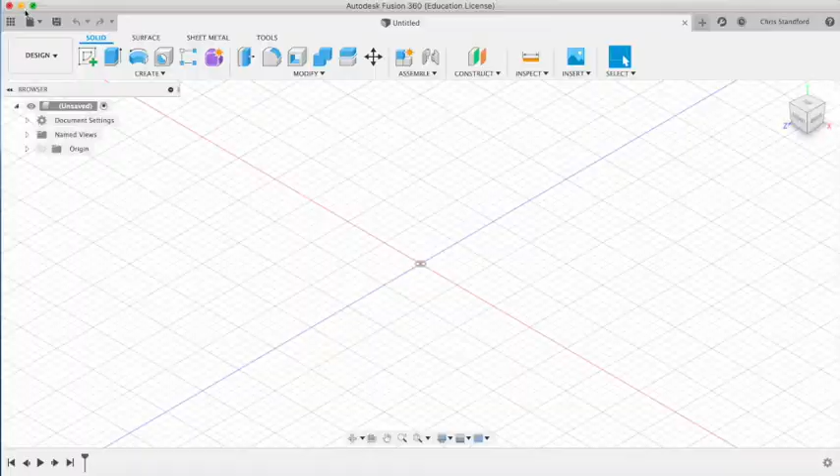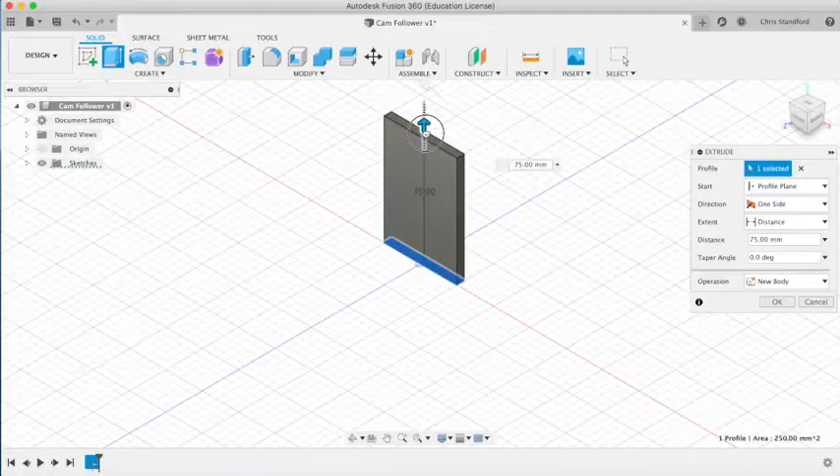So we're going to start by saving our new file. I'll call it cam follower. Then we're going to create a sketch on the bottom plane so we can extrude that out. We're going to go 50 by 5 millimeters and then extrude that up. Let's go for 75.

And then on that face I'm going to create a 15mm lip along the top and extrude that out by 10 millimeters. So this is just something to mount our cam and our follower on.

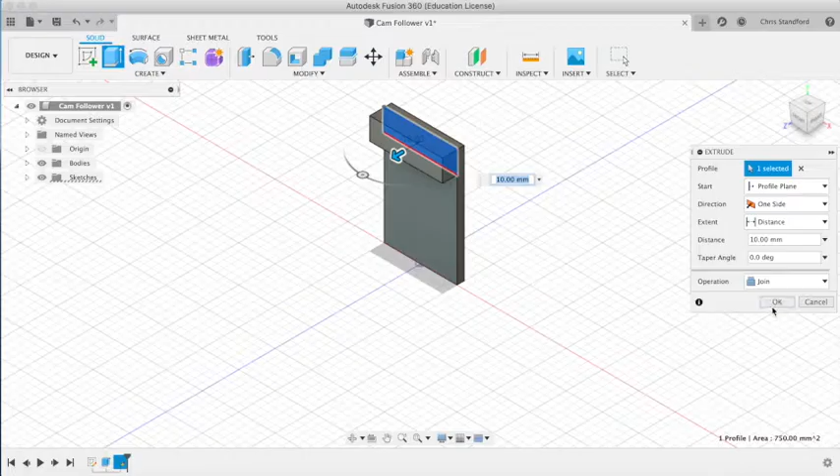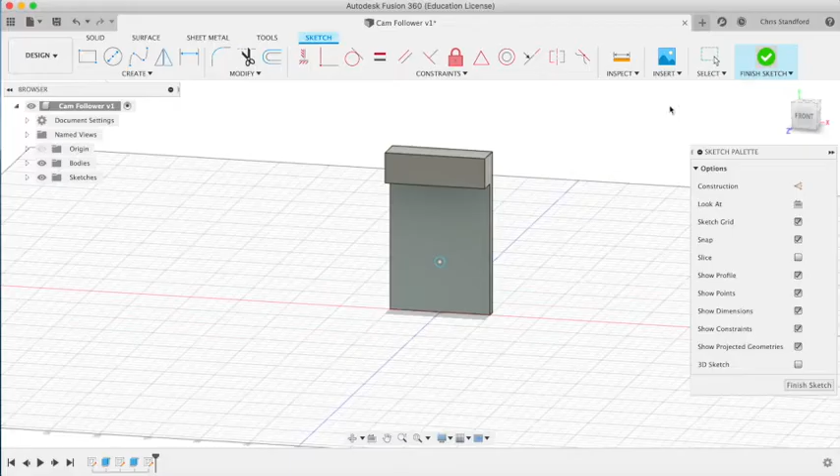Now we need a spindle for our cam to revolve around. So we're going to create another sketch and create a 5mm diameter circle and then extrude that out by 5 millimeters as well. And then we have our frame in which to mount our cam and our follower on.

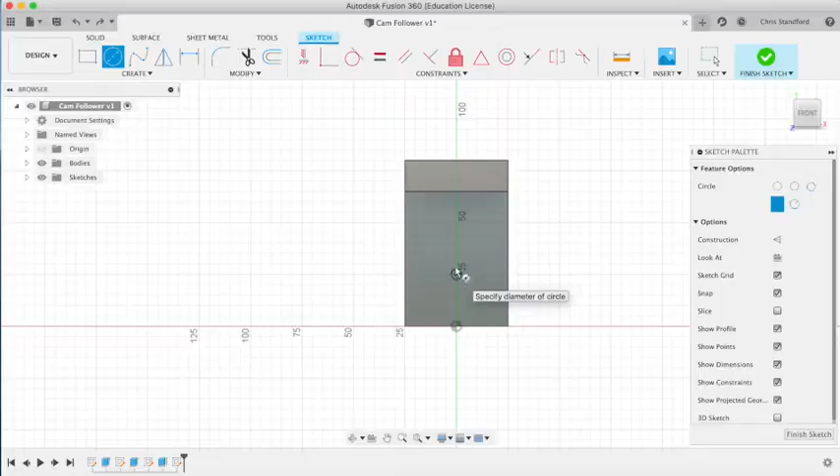So if we want to create our cam, we're going to draw a sketch on the surface of that frame. And I'm going to use two circles, a 20mm circle and a 10mm circle to create the shape of my cam. And then I'm going to use the line tool to join those two circles up.

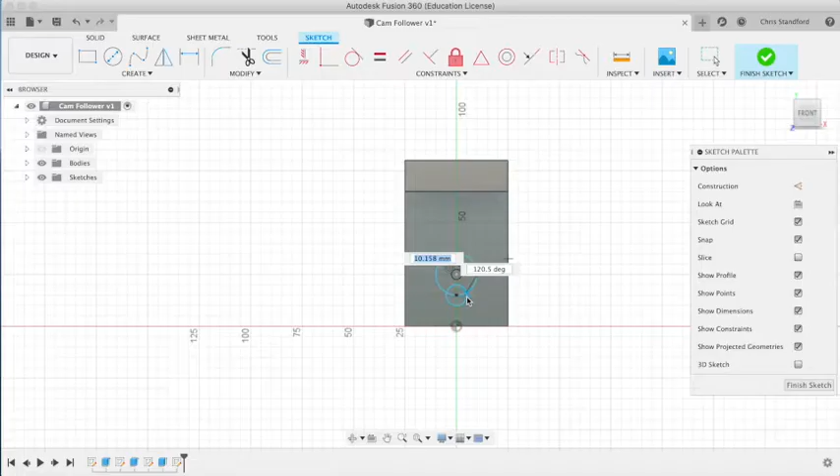So if we go to create, then it's a line, or we can just press L, we'll do the same, and we can draw a line from the large circle to the smaller circle. If they don't quite line up now, don't worry, because we can just go to the tangent button there, click on the line, click on the circle, and it'll then line those two items up.

Once we're happy it lines up, we can trim off the extra bits using the trim tool and then finish our sketch.

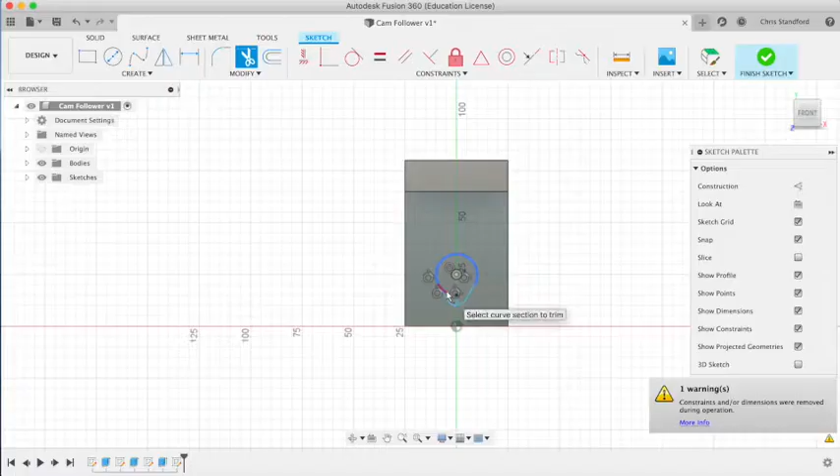We can then extrude our cam shape. It's important when we extrude that we need to change the operation to new components, so it is a separate entity to the frame, and then we can extrude that by 5 millimeters.

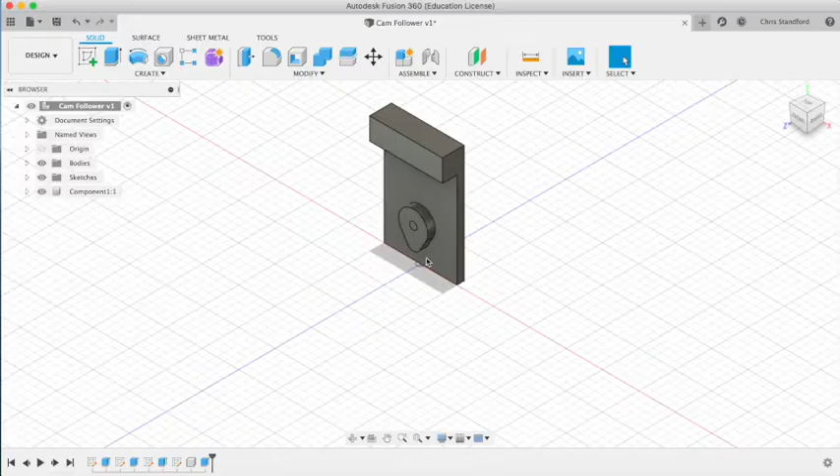Just to help me distinguish the different components on the screen, I'm going to then attach different material appearances to my elements. This just makes the different components clear to me on screen.

So if I grab my cam and move it to one side using the mouse, you'll see at the moment it isn't attached to the frame. So we're going to assemble that.

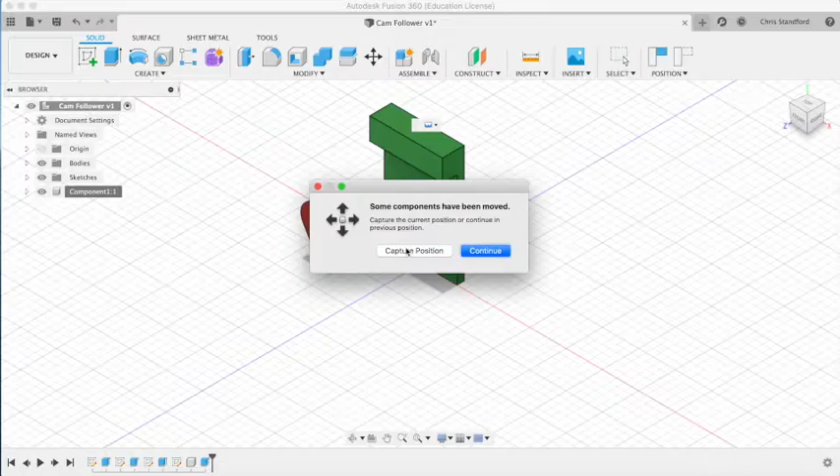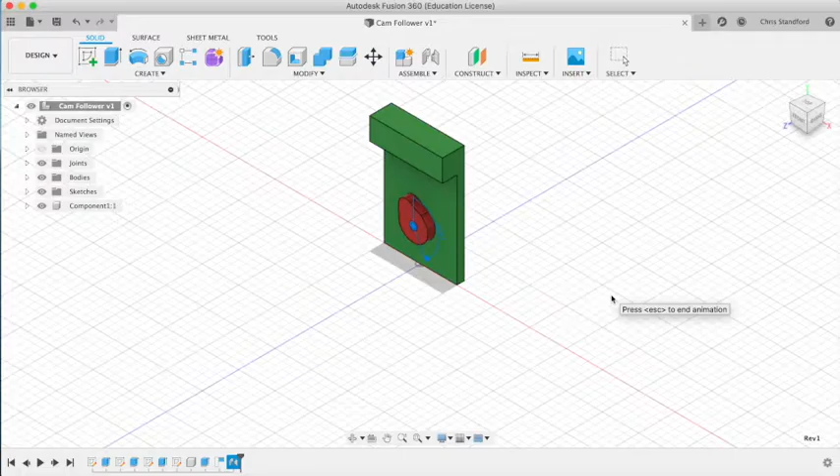I'm going to click the center of that circle and the center of that spindle. And then we're going to change the motion to a revolute, which means you can see it spinning there on the animation. OK, so if I right click on my joint icon and click on animate model, you can see it spins there as I'd like it to. Press escape to stop the animation.

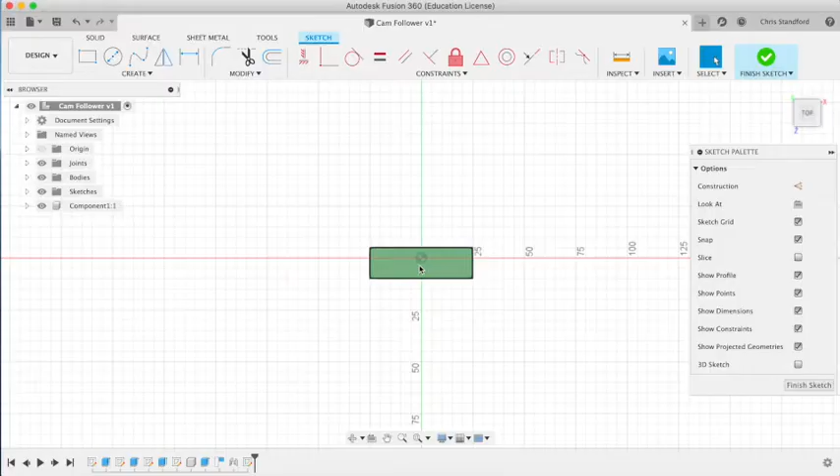Next job, we're going to create a hole for our follower. So sketching on the top surface, we are going to create a 5mm diameter hole. We can't use the grid to center this time because the grid lines are in millimeters and we want it to be 7.5 millimeters, which is half of the 15.

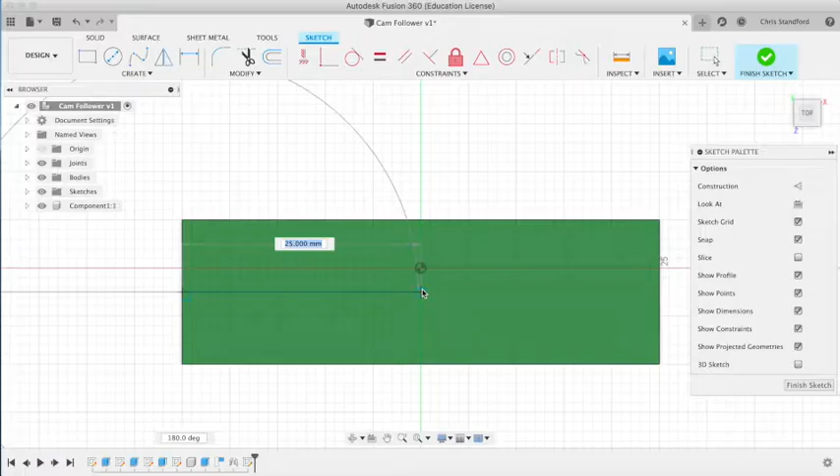So we're going to start by drawing a guideline from the center point of there out to the middle, and we can use that then to center our circle. So we've got a 5mm circle, click on finish sketch, and we can then extrude that.

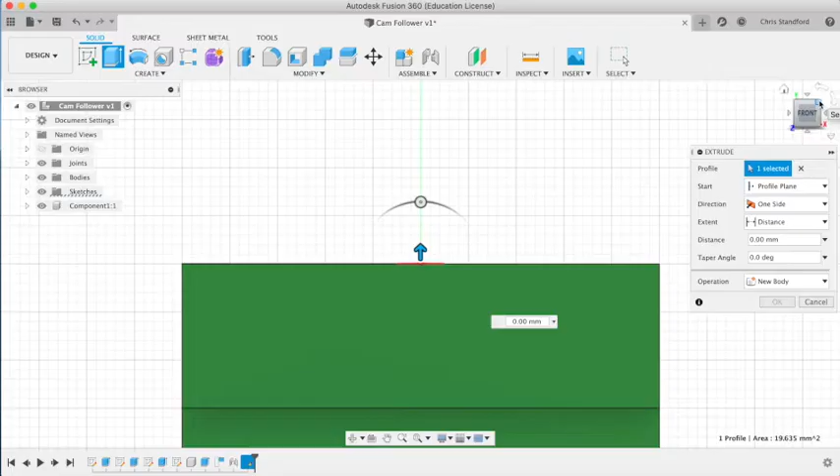Let's just see it from a different angle. Oops, let's try it again. We can now extrude that down, so -15, so it cuts away through that frame. Make sure it's gone all the way through. Operation cut, OK.

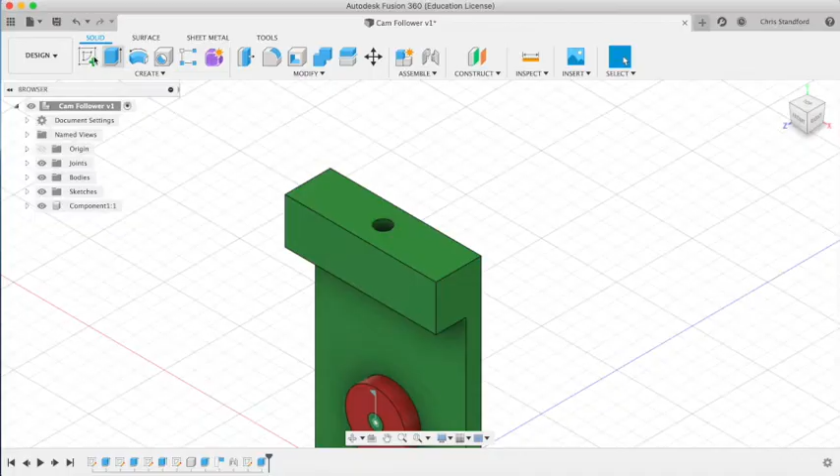Next we're going to create our follower. So again, sketching on the top surface, we can create a 5mm circle in the same place as the hole, and then we can extrude that down to meet the cam.

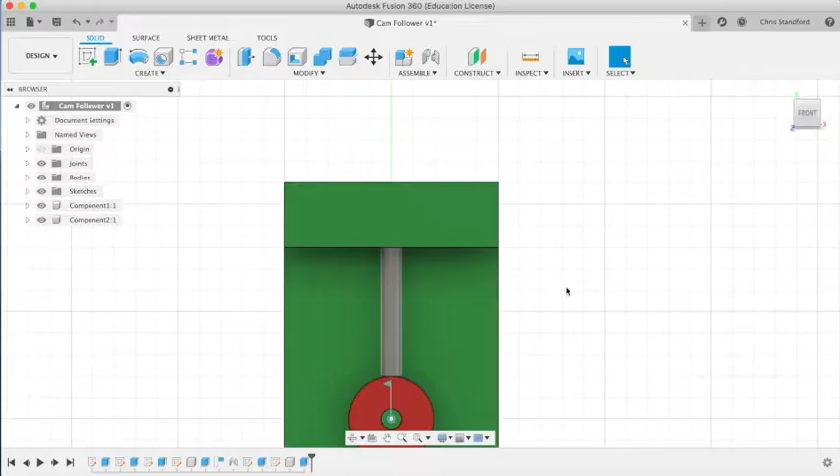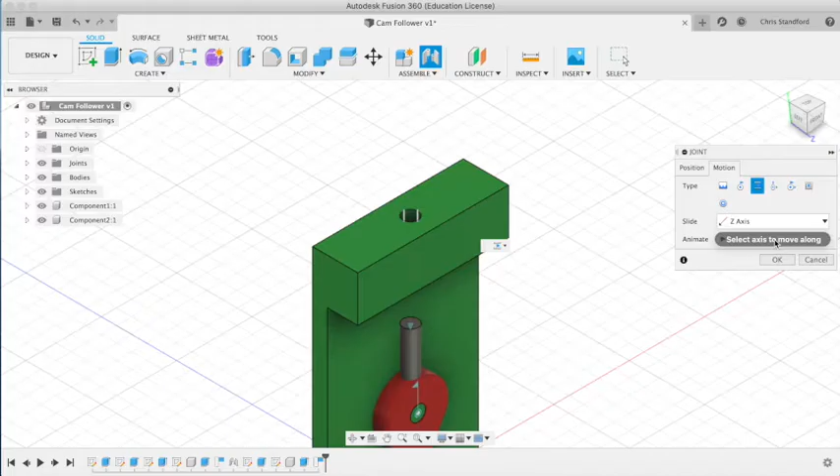Just like the cam, if we try and move that follower, you can see it's not attached. So we're going to assemble those two components as well. We go to assemble joint, and this time, rather than it being a revolute motion, you can see it spinning there on the axis. We're going to go to motion and create a slider joint, which means it's going to slide.

It's going to slide up and down through that hole along the z-axis. Let's just quickly give that a material appearance as well. We'll go for blue.

So our follower now slides up and down along that axis, but it goes through the cam, which we don't want to happen. So we're going to set some limits for our motion.

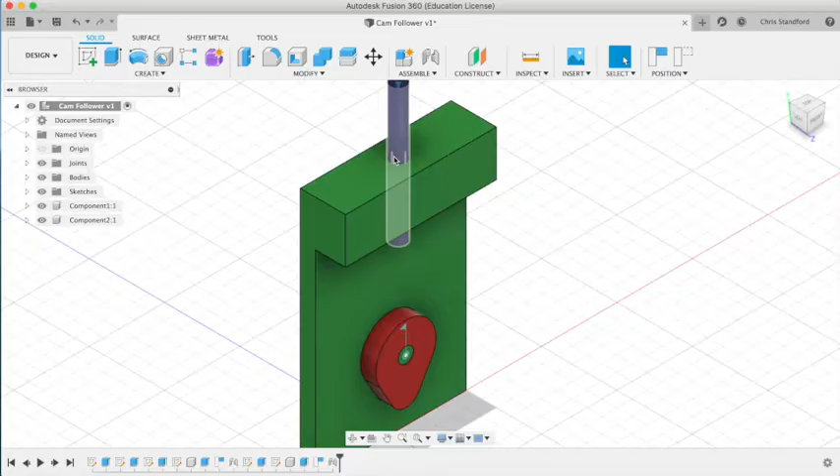If we right click on our little motion symbol, we can click to edit joint limits. We can have a resting point. So now if I click on resting and 0, whenever I move that and let go, it'll automatically go back to that resting point. So I can move it up or down, and it'll automatically spring back to that resting point.

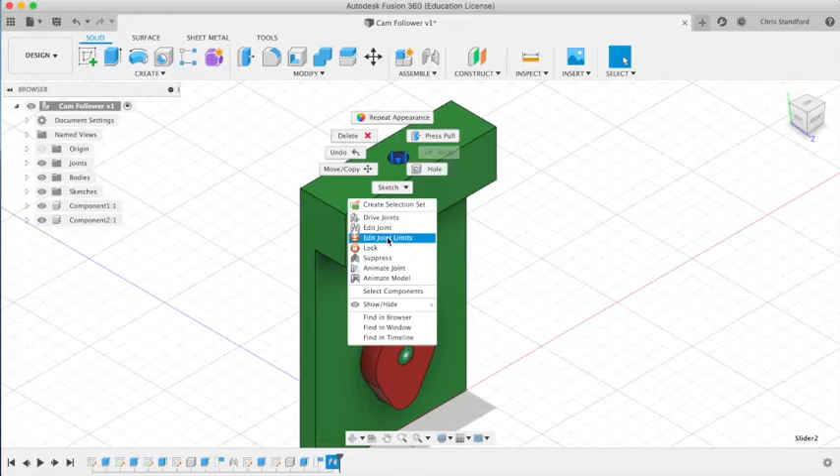But I don't want it to go down, I only want it to go up. So we're going to right click again, edit joint limits, and give it a maximum movement as well, so we'll tick the maximum box. The maximum is going to be 0 as well. If I animate that now without it, you can see it goes up and down. If I click on maximum, now it only goes up and ends at that 0 point.

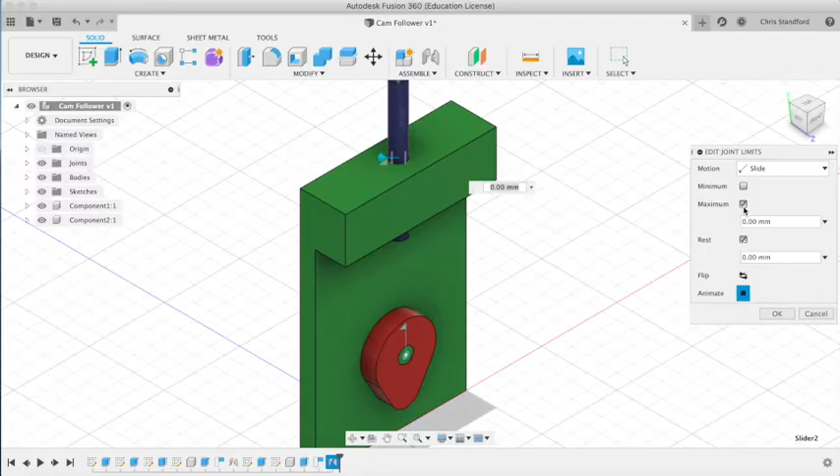So now the follower moves up and down like it should, and the cam rotates like it should. However, when I animate my model, you'll see when the cam rotates, it just goes through the follower as if the two don't exist in the same model.

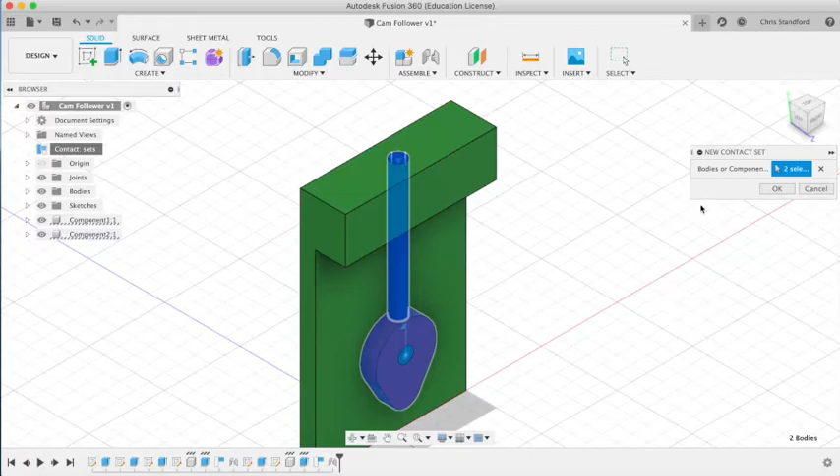So we need to create some contact sets. We're going to click on assemble, then enable contact sets, and this contact sets icon appears. We click on new contact set, and we just want to click on the two components that we want to be able to relate to each other physically. I'll click on OK, and now if I animate that joint, right click, animate model, you'll notice the cam pushes that follower up.

Now, as you can see, it's a little bit sticky the way it moves at the moment, and that simulates what would happen in real life quite well. That's because it's trying to move the follower sideways because of that flat end.

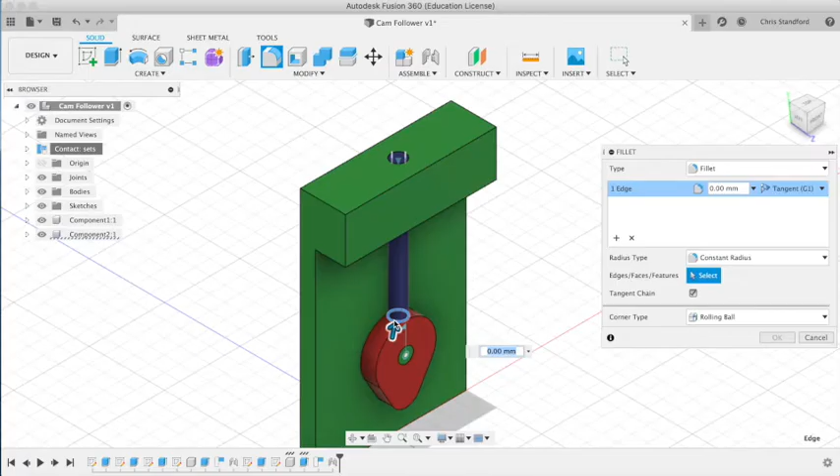So what we can do to reduce that is create a rounded end to our follower, and then animate that again. You'll see that that creates a much smoother motion, as it would do in real life.

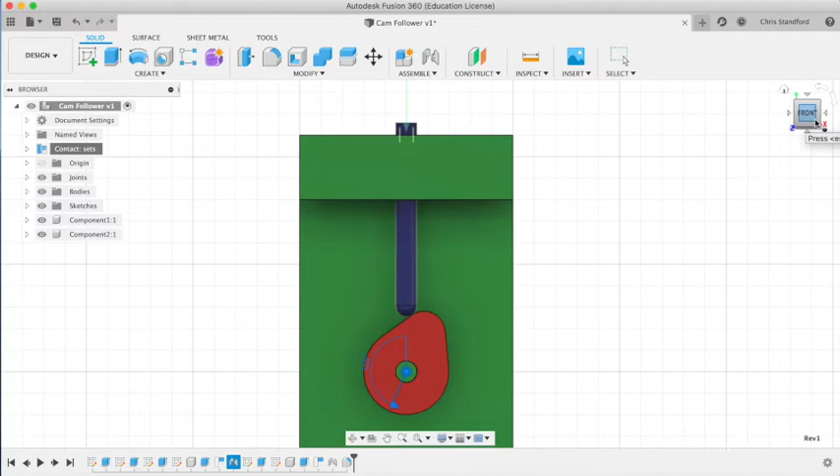So if we take a look at another model I've made with different shape cams, the shape or the profile of the cam makes a big difference to the movement of the follower.

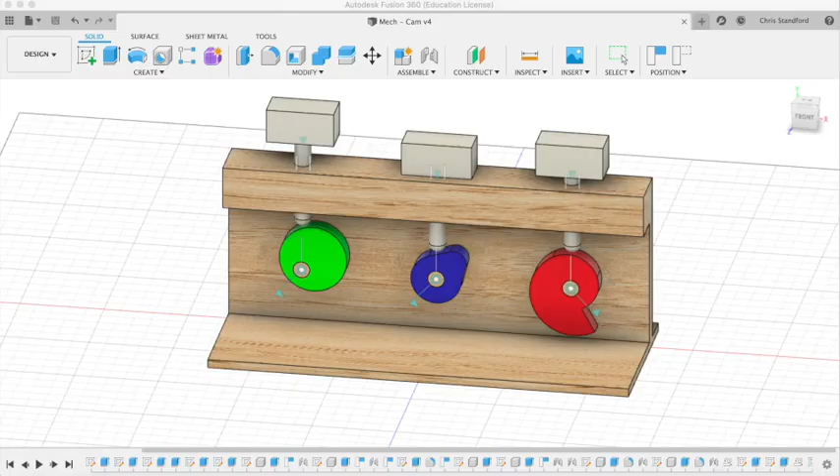The green eccentric circle cam allows the follower to do a long, smooth motion, continuously moving up and down. The blue pear-shaped cam stays stationary for the majority of the rotation and then suddenly goes up and down as it hits the lump, while the drop cam goes up slowly and then suddenly drops.